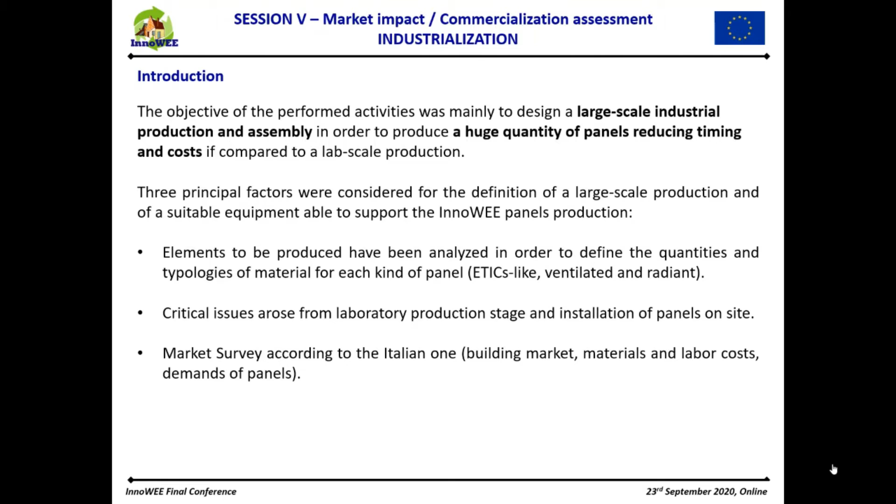Sorry. You have to have it in front. Please share again. Okay, sorry. It's perfect. It's correct.

A suitable number of panels to produce in a large-scale production process has been defined, equal to 200,000 square meters per year, divided into the different types of panels studied in the InnoWEE project. So about 100,000 square meters for the ETICs solution, 60,000 square meters for the ventilated solution, and 40,000 square meters for radiant panels.

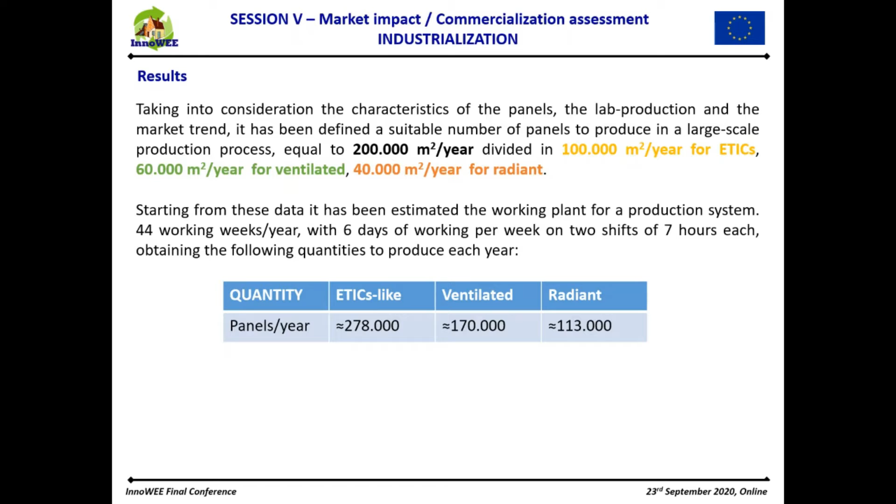We have supposed 44 working weeks in a year, with 6 working days a week on 2 shifts of 7 hours each. In these slides, you can see the phases for the production of the 3 types of panels.

So you can see the preparation of the materials for the cast of the panels, the production of geopolymer, the casting of the panels, laying the reinforcement and the EPS panel for ETICs and radiant solution, and the WGP panels for the ventilated solution. Then securing the upper mold, the first curing, the demolding of the panels, and turning

the panels upside down. The second curing, and for the ventilated solution, drilling holes in the elements, and at the end, the painting, drying, and the storage of the elements.

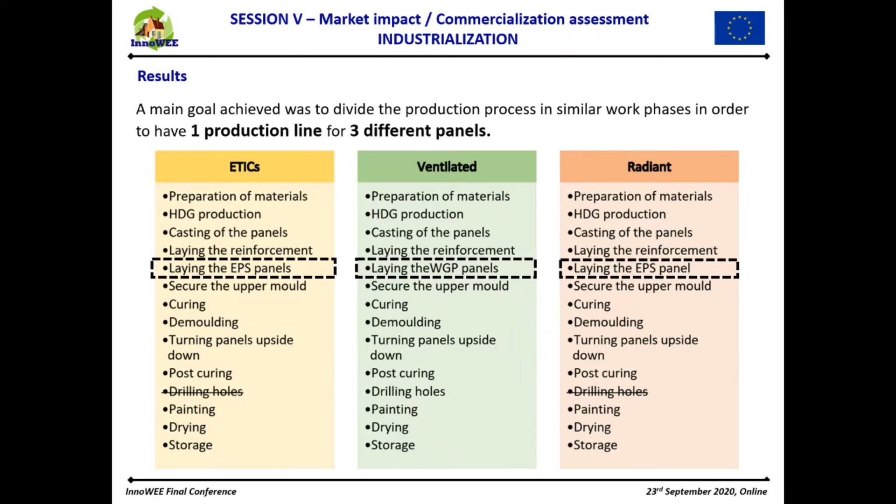Now you can see a general layout for a production plant for this type of panels, with 3 different areas. The mixing plant, where we produce the geopolymer, the production line composed of 11 stations, and the cleaning system where we clean the molds.

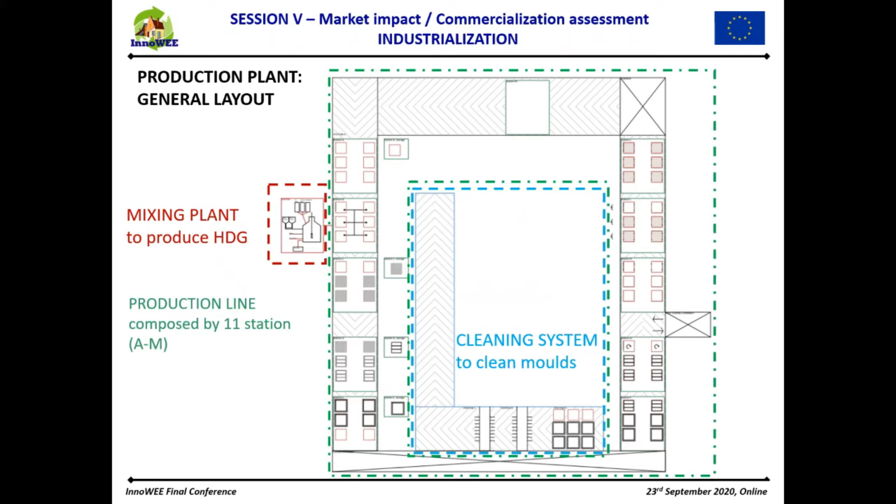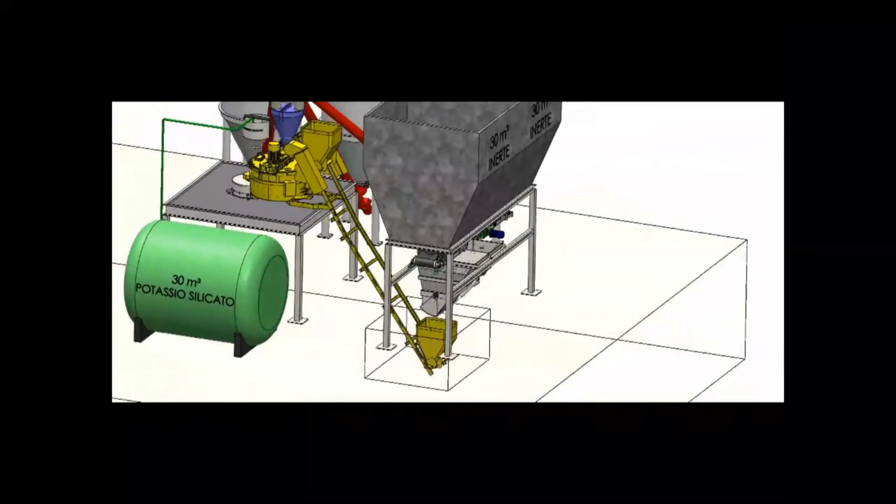In this video, you can see the mixing plant. The mixing plant is dimensioned to produce 8 cubic meters a day, about 2,000 cubic meters a year of geopolymer. It is composed of 3 silos for the powders, in particular furnace slag, fly ashes, and metakaolin.

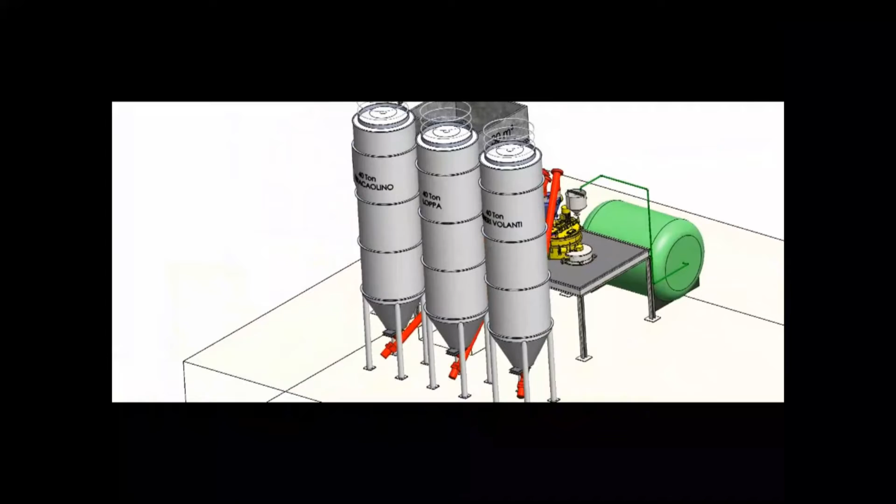1 mixer of about 250 liters, 2 hoppers for aggregates, 1 container of potassium silicate, and an automatic cleaning system for the mixer and the pipes.

The production plant is composed of 11 stations from A to M. You can see station A, where the molds are placed on the tray. Station B, where the geopolymer is cast in the molds. Station C, where the reinforcements, glass fiber mesh and bars, are placed in the molds.

Station D, where EPS or WGP panels are placed above the geopolymer. Station E, where the upper mold is placed above the lower one. Then we have the first curing chamber, where the panels remain for about 12 hours at 50 degrees. Station F, where the upper mold is removed and placed at cleaning station A.

Station G, where the panels are turned upside down and the lower mold is placed on cleaning station A. The second curing chamber: the panels stay in this chamber at environmental temperature and controlled humidity for about 96 hours. Station H, where the panels are drilled, only for the ventilated solution.

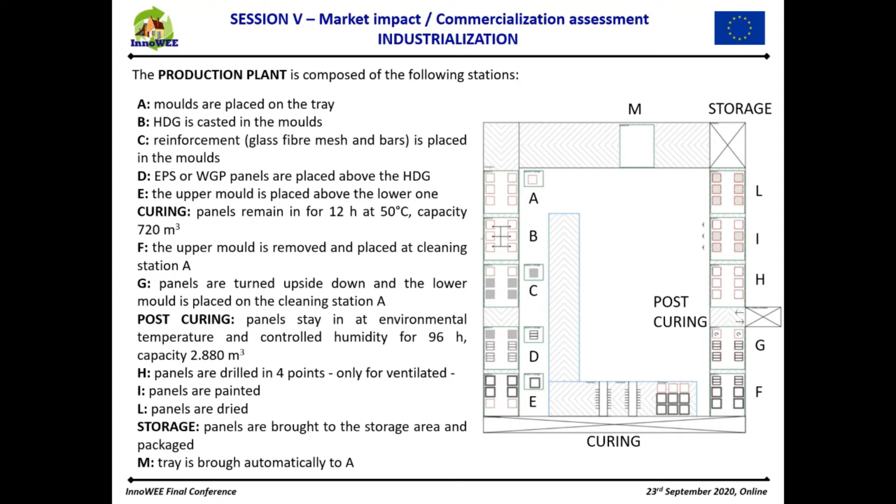The cleaning system is composed of 4 stations. Station A, where the molds are placed to start the cleaning process. Station B, where the molds are cleaned with the use of thinner oil. Station C, where we use release oil to spread on the molds.

And finally, station D, where the cleaned molds are placed closer to the production lines. In particular, the lower molds have to be placed in storage A, while the upper ones in storage B.

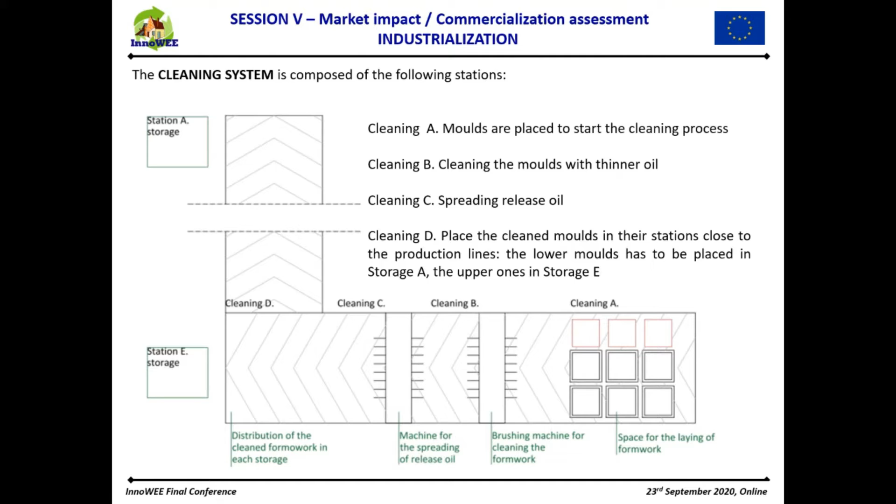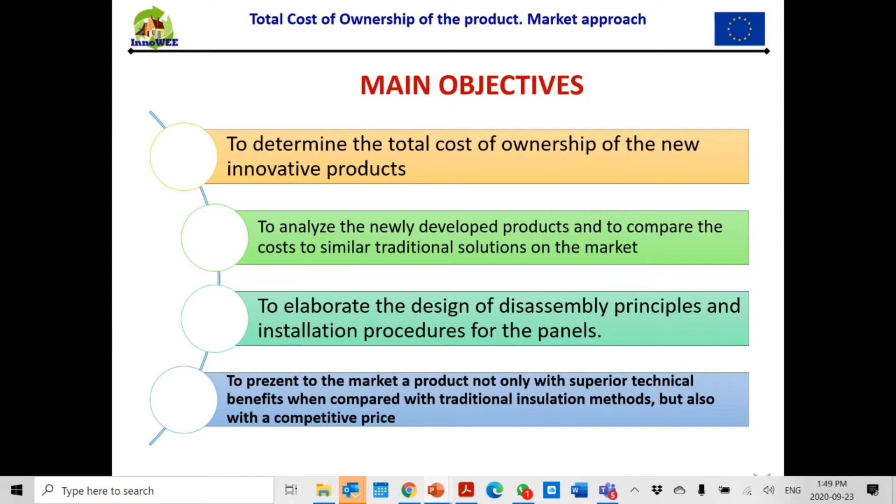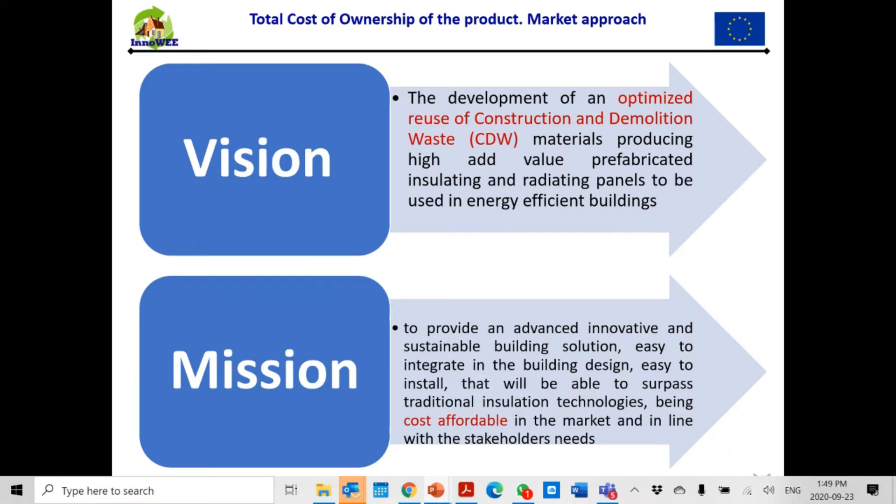Our vision was the development of an optimized reuse of construction and demolition waste materials, producing high added value prefabricated insulating and radiating panels to be used in energy efficiency. And our mission was to provide an advanced, innovative and sustainable building solution, easy to integrate in the building design, easy to install, that will be able to surpass traditional insulation technologies, being of course also cost affordable in the market and in line with the stakeholders' needs.

In order to define and calculate the TCO, the total cost of ownership of the product, we used the formula that you can see on my screen. In the TCO calculation we considered the production cost. We added also the installation cost of all three typologies of the products. We added also the maintenance cost, the dismounting cost after the 30 years of lifespan of the product, and we subtracted the remaining value.

In order to reach our objective, we first set up and identified all our cost elements. We compared the cost elements and the final result of the cost with the cost of traditional products existing in the market at this moment. We added the installation cost and other operational costs together with the production cost of the product, and finally we obtained the TCO results.

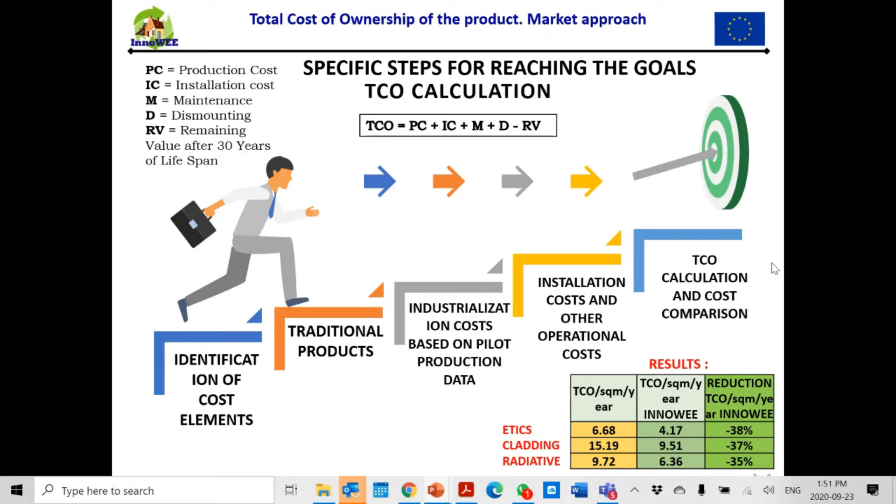To jump directly to the results that we obtained, here you can see the percentage of reduction of our InnoWEE products for the three typologies, ETICS, cladding, and radiative. Compared with the traditional existing products in the market, we obtained minus 35% for radiative, minus 37% for cladding, and minus 38% for ETICS in terms of cost reduction. These are very good results for the objective that we proposed at the beginning of the project.

Here I want to briefly present to you the traditional products in the market that we compared with. For the ETICS, it was quite difficult to find similar traditional products, because the particularity of our product is that it is already ready to be installed at the installation point, while the traditional products have to be worked on site. For cladding, the cost mostly varies depending on the typology of the material chosen for the ventilated panel, so wood, gres, marble, and on the fixing system needed in relation to the material of the panels. And we took as similar products the products from Terramilano engineer, and Sto Italia.

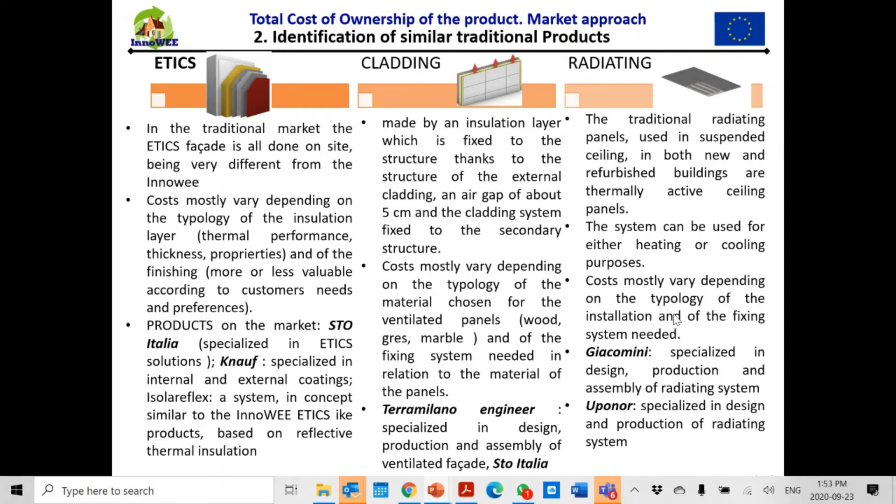For radiating panels, the traditional systems existing in the market at this moment can be used for either heating or cooling purposes. Their costs mostly vary depending on the typology of the installation and of the fixing system needed. We took as base for our comparison the Giacomini panels and Uponor panels, which is specialized in design and production of radiating systems.

Of course, the first question that we addressed, which constitutes the beginning of our study, was what is missing in the market at this moment. And the answer is that the traditional envelope insulation system presents some problems related to durability, performance in terms of maintenance, application based on hard labor, and of course high cost. All these issues can be minimized through the installation of an effective insulation system endowed with outstanding insulation capabilities.

Our goal, taking into consideration our goal, was to present to the market a product with superior technical benefits compared with traditional insulation methods. We can say that we have a very good result from this point of view because our innovative InnoWEE products present, compared with the traditional one, high insulation characteristics and high durability.

In time, our product has 30 years of lifespan compared with approximately 20 years for traditional products. Our InnoWEE products present lower energy consumption and lower application costs, being a product that can be used also for historical monuments.

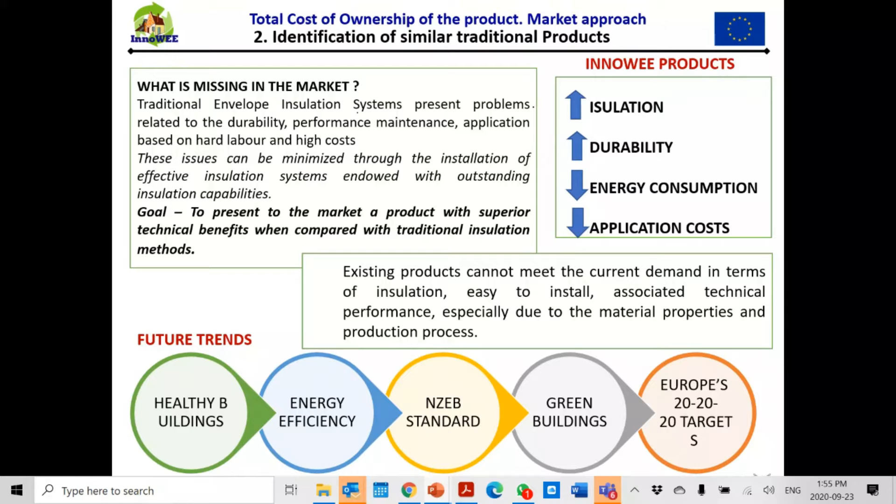Also, we are proud to say that our InnoWEE products reach all the future trends that are healthy buildings, energy efficiency and NZEB standard, green buildings, and touch also the Europe's 20-20-20 targets imposed by the European Commission.

Why does a building need superinsulation? That was another question that we addressed in our study. Walls are ordinarily the biggest responsible for the total heat lost and also gain throughout the envelope, so total heat loss or gain can be more than 35%. That's why our product comes with evident added value.

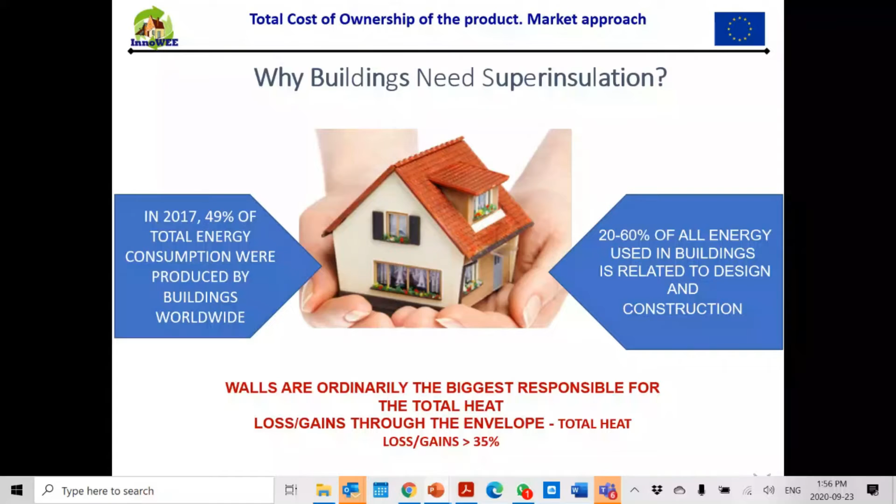Apart from the direct benefits that I expressed before, our InnoWEE product presents a lot of indirect benefits that we consider in the analysis of all three typologies of our products: long service lifetime, reducing environmental pollution and damages, reduction of energy spent during the whole life cycle of the building, easy and simple installation, low installation time and cost, significant cost reduction, retrofitting capability, respect for sustainable principles, safety and security, low maintenance and operational cost, adaptability from the viewpoint of dimension, ideal for historical monuments rehabilitation, and future recyclability.

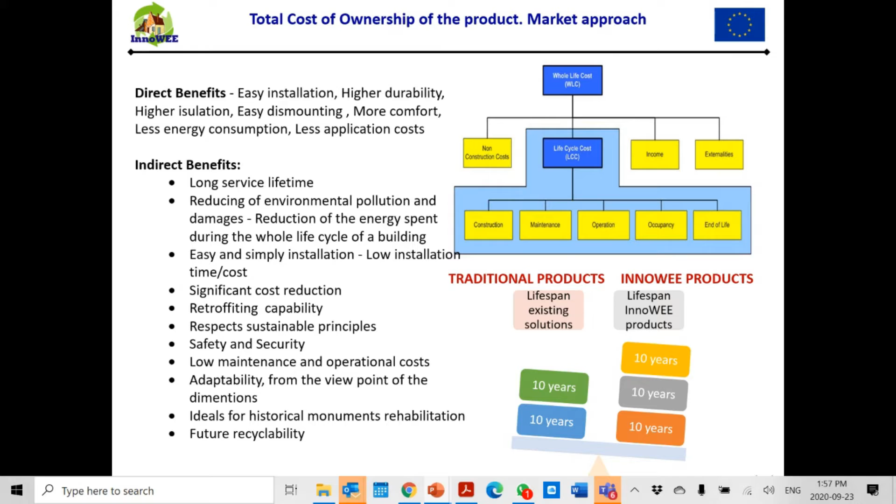Here you can see the lifespan of our product compared with the lifespan of existing solutions. As you can see, our product has 10 years more than the lifespan of the traditional existing solutions in the market.

In order to calculate the final TCO, the total cost of ownership of our product, we considered the pre-production, production, and post-production stages, taking into consideration the hidden costs, support staff, training, management, network, the direct costs, the indirect costs, the maintenance and technical support, and of course the dismounting cost of the product after the end of the lifespan.

In the product stage and preparation stage, we took into consideration raw material supply and the transport to the factory. The conclusion after our analysis was that the factory should be at a maximum distance of no more than 200 kilometers. This is the optimum distance.

Another cost was the manufacturing construction process, transport to the building site, and construction installation process. In the use stage, the costs related to use, maintenance, repair, replacement, refurbishment, operational energy, and operational water use. And regarding the end of life: deconstruction, transport to the landfill, processing, waste processing for reuse, recovering, recycling, disposal, benefits and loads beyond the system boundary, and reuse, recovery, recycling of the product.

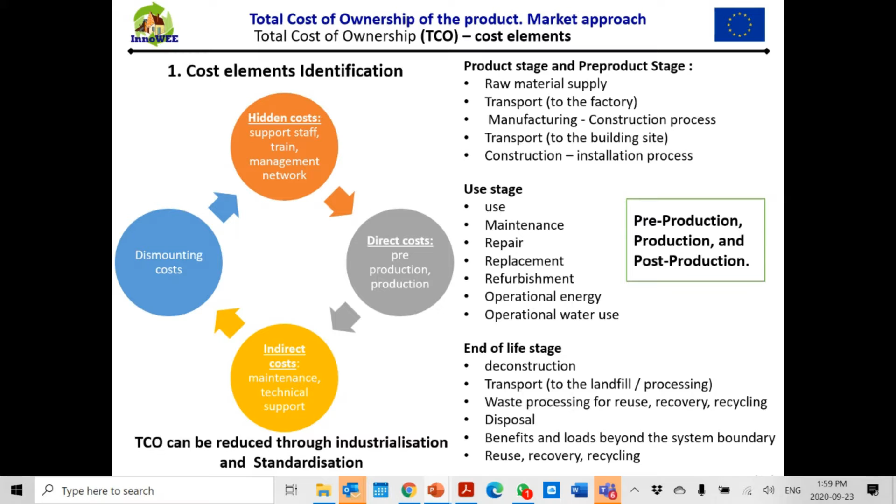We can summarize by saying that the final TCO can, of course, be reduced through industrialization and through the standardization of all the production processes of the three categories of product.

Regarding the methodology that we used for the TCO calculation, I presented before the formula and the relative costs that we took into consideration. We also took into consideration the lifespan of 30 years for our product compared with 20 years for traditional products. We took into consideration also some labor cost as a function of territoriality.

As methodology, first of all we choose the products that we want to compare with. We calculate the TCO, which is an estimation, a range of the cost of the products existing on the market. After that, we calculate the TCO of our product, and finally we compare the two results.

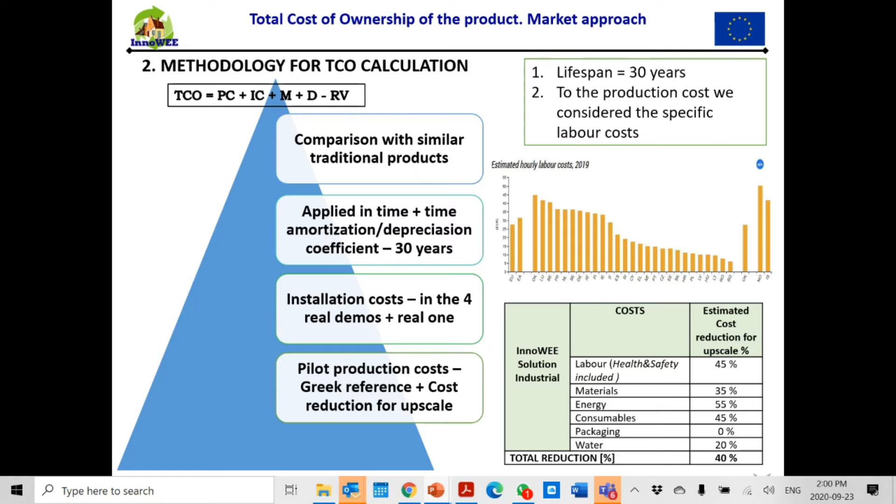Here I want to briefly present some results. Here you can see the calculation of the industrialization cost of our product. As a methodology, we took into consideration the cost from the pilot plant, to which we applied a total reduction of about 40%. For adapting other more efficient production methods, we applied a reduction of 15%, and 12% for improving the performance of current production methods.

Thinking of an industrialization process, that means about 2,000 products per day as an optimum production.

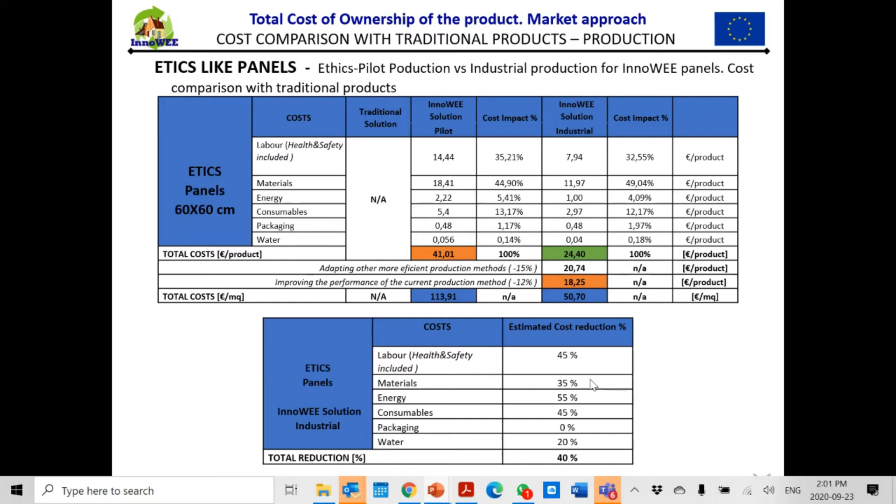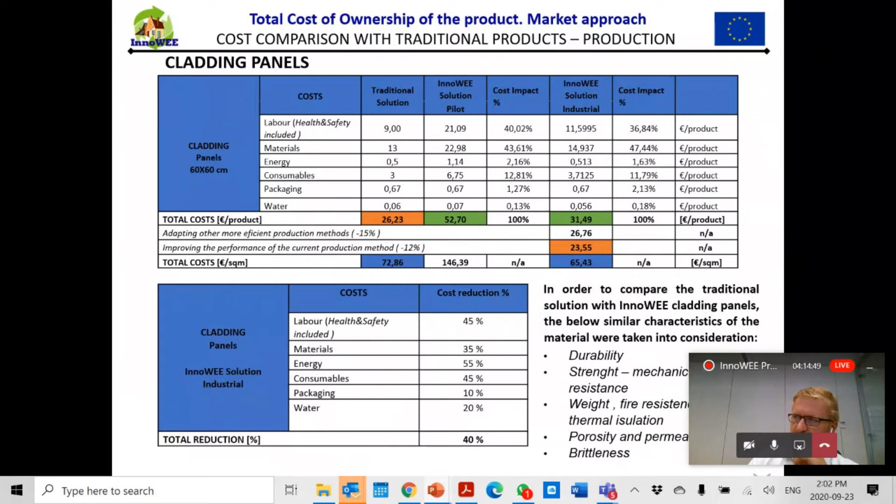Here you can see the results for cladding panels. We used the same methodology for radiative panels, and the results we obtain, as you can see here, from the point of view of the production process, show that our products could be inferior regarding production cost compared with the traditional one. Meanwhile, the ETICS products present production costs superior, not much, but superior to the traditional solutions.

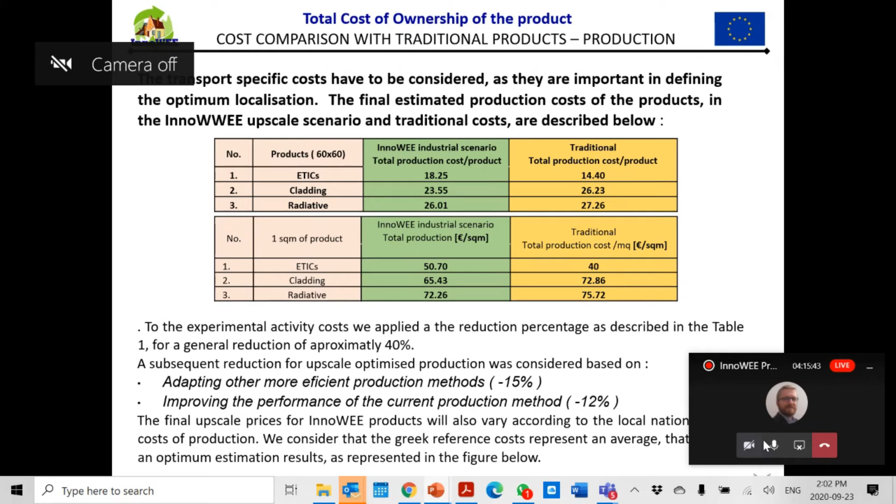Sorry, it's blocked. Can you hear me? Yes, Loredana, I hear you. You need to share the screen of your Teams now. Please go back to the presentation. Sorry, I don't know what happened. Maybe you closed it, don't worry. Okay, share again. Did you see this slide?

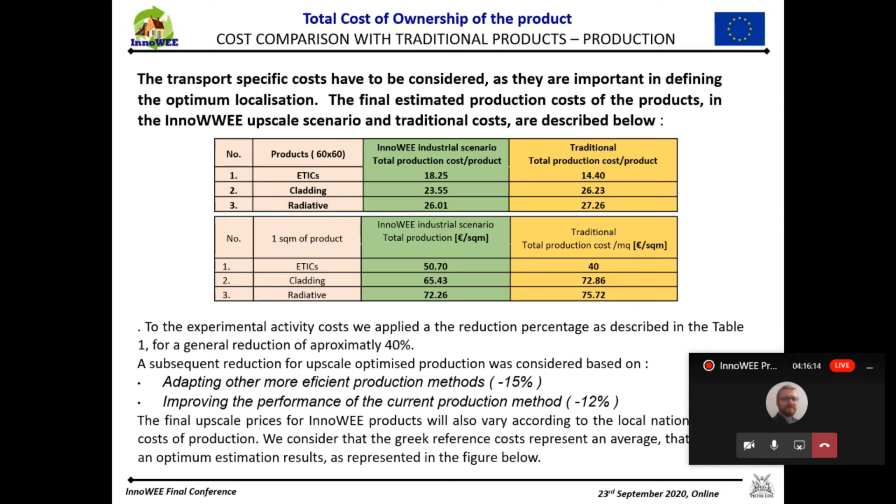Yes, this is where the transport specific costs have to be considered. So we gain in terms of final TCO results. We gain with installation costs that are inferior to the existing traditional solutions, and of course we gain a lot by presenting to the market a product with a long lifespan, 10 years more than traditional products. So the final results show that our three product typologies have a decreased cost compared with traditional solutions, between 35% and 38%. We are proud of these results, and we trust that our product has not only superior technical characteristics.

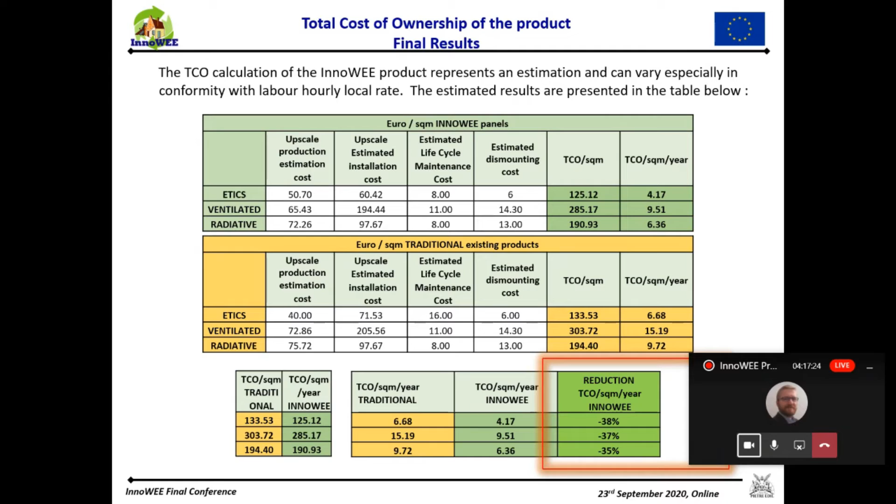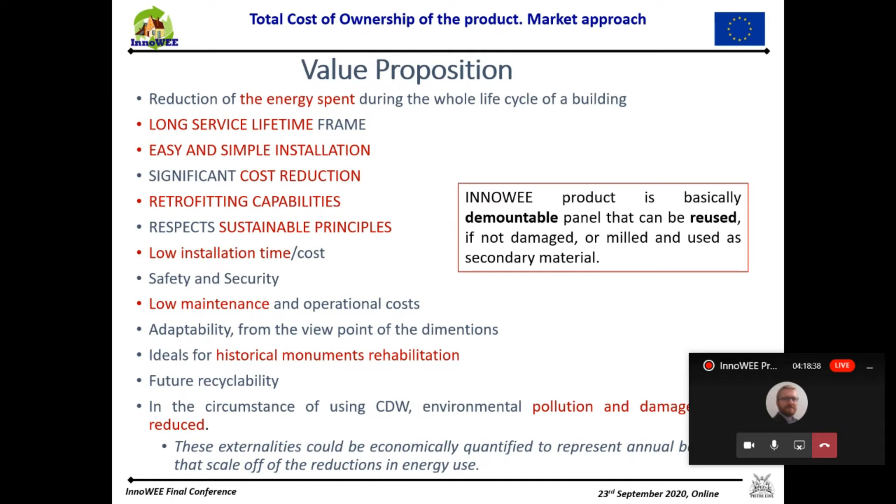In the circumstance of using CDW, environmental pollution and damage will be reduced. All these externalities, as I presented to you, have also been economically quantified. The InnoWEE product is basically a demountable panel that can be reused if not damaged, or milled and used as secondary material.

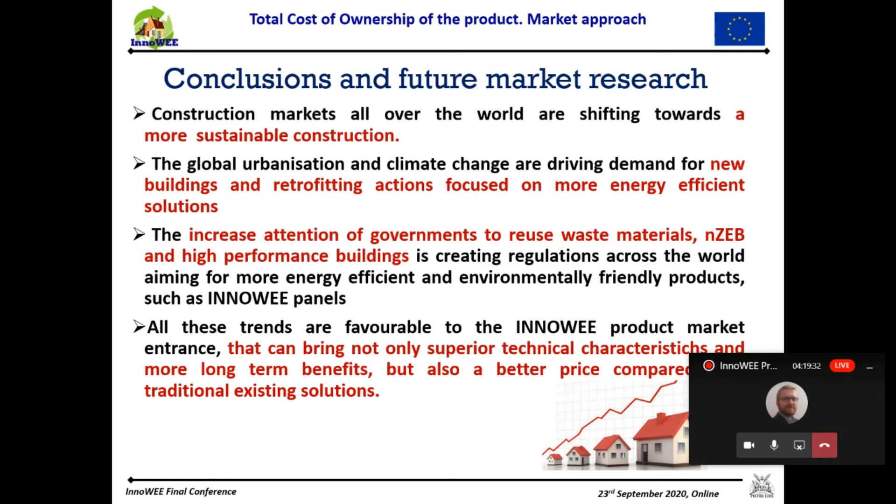Some conclusions and future market research: the construction market all over the world is shifting towards more sustainable construction. Global urbanization and climate change are driving demand for new buildings and retrofitting actions focused on more energy efficient solutions, with increased attention from governments to reuse waste materials, and nZEB and high performance buildings. All of these trends are favorable to the InnoWEE product's market entrance, which can bring not only superior characteristics and long-term benefits, but also a better price compared with traditional existing solutions. Thank you for your attention.

We really trust in our product and hope to see it in the market as soon as possible. So any business needs accountants, and now I'm sure that having Loredana on board, I could make the success.

Now it's the turn of Jakub Pluta from IZNAP Poland to give the speech on exploitation plans. Jakub, the floor is yours. Good morning to all the attendees of this conference. My name is Jakub Pluta, and I'm an engineer from IZNAP, the Polish SME, a partner in the InnoWEE project. I will present the exploitation plans of the InnoWEE project.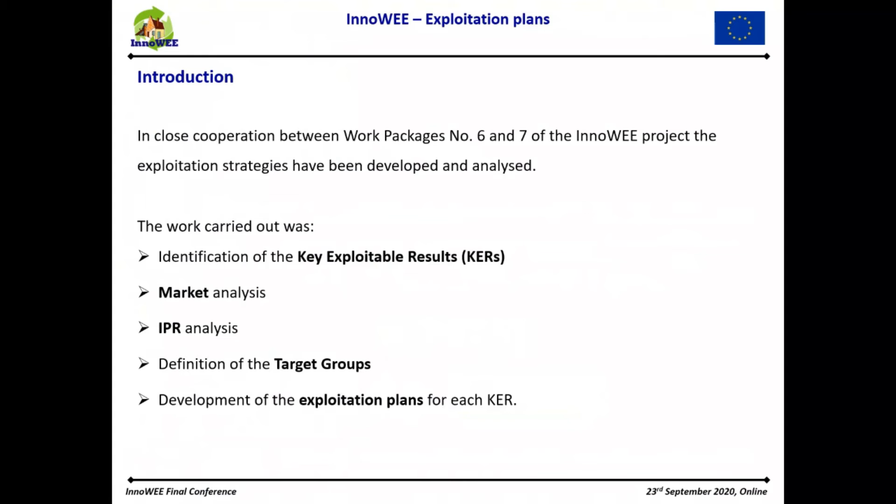These plans have been developed in cooperation between two specific work packages of the project: work package 6 for market and cost analysis, and work package 7 for exploitation and intellectual property rights management, to provide the exploitation strategies for InnoWEE results. We had to follow certain steps: first, define the project results and more specifically the key exploitable results; then analyze the market situation to identify competitive products and define the innovativeness of our results; with IPR analysis for each result, establish its ownership; then define our target groups of customers to offer the results to. With this, we were able to develop the exploitation plans for each key exploitable result.

But what exactly is the key exploitable result? It is the result of a single project result or a few project results, which together can provide a competitive product or service to the market, and which bring the innovativeness that makes it competitive and different from other technologies currently in the market.

So simply, the key exploitable result is the result which has potential to be commercialized in the market. After 4 years of the project, in the final list of results, we identified 10 key exploitable results, and here I will present 4 products.

One of them is the pilot plant modified for production of fine fraction secondary raw materials from construction and demolition waste, in the size required for geopolymer production. It provides aggregates of size from 0 to 2 millimeters, and also allows us to adjust the size as we want.

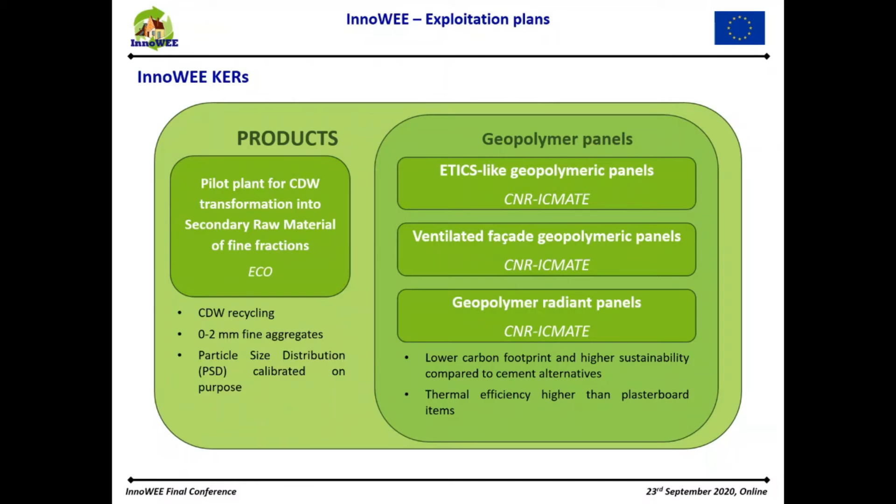There are also 3 processes as a result of the InnoWEE project. One is the geopolymer panel production unit. Here the strong point is the owner's strong know-how in building and modification of production lines for geopolymers. This solution is now some kind of unique in the current market.

The other 2 processes are the production process and optimization for 2 geopolymer binders: one inorganic, with inorganic construction and demolition waste incorporated, and a wood binder with wood waste content. Similar to the panels, they also provide a lower carbon footprint by incorporation of construction demolition waste. They are optimized to be used in production of geopolymer construction elements for building and production processes.

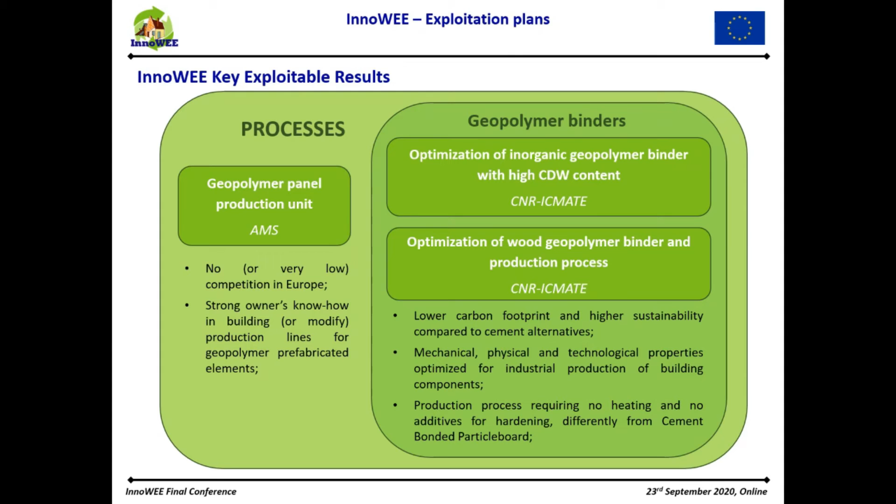The production process of the binders does not require providing heat or other additives for hardening, which is needed in case of other alternatives. The last 3 key exploitable results are services.

The first is the prototype IR procedure for thermal testing of ETICS walls. It offers easy to perform thermal tests and now has no competitors in the market. The life cycle assessment of geopolymer products provides the LCA datasheet for geopolymer-based products based on real data and tests obtained directly during the 4 years of the InnoWEE project.

InnoWEE also offers a new engineering design for geopolymer prefabricated panels. This result is an innovation by itself, as there are currently no geopolymer panel solutions available in the market, so there is no design for how to use them.

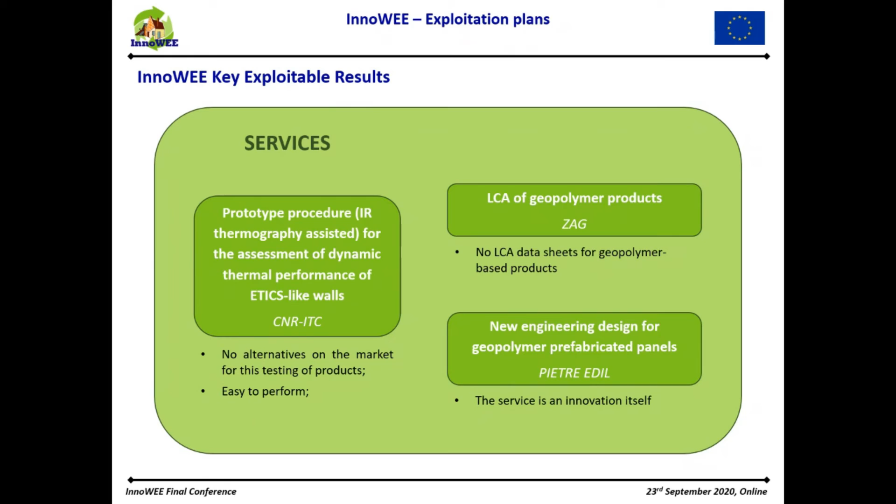The next part was the definition of the target customers. In case of InnoWEE, they are the geopolymer manufacturers, to whom we will offer the fine fraction secondary raw materials, the geopolymer binders, and the LCA service.

For the manufacturers and distributors of prefabricated elements for buildings, InnoWEE offers 3 types of panels and a production unit for geopolymer panels.

For heating, ventilation, and air conditioning installers, they can be interested in the radiant panels for heating or cooling, and in the IR test for the ETICS walls.

The new engineering design can be offered to architects, constructors, and public authorities, but constructors can also be interested in all the panels and use of the secondary raw material aggregates in other applications, as the aggregates in sizes not suitable for geopolymer production can be successfully used, for example, as fillings in road construction.

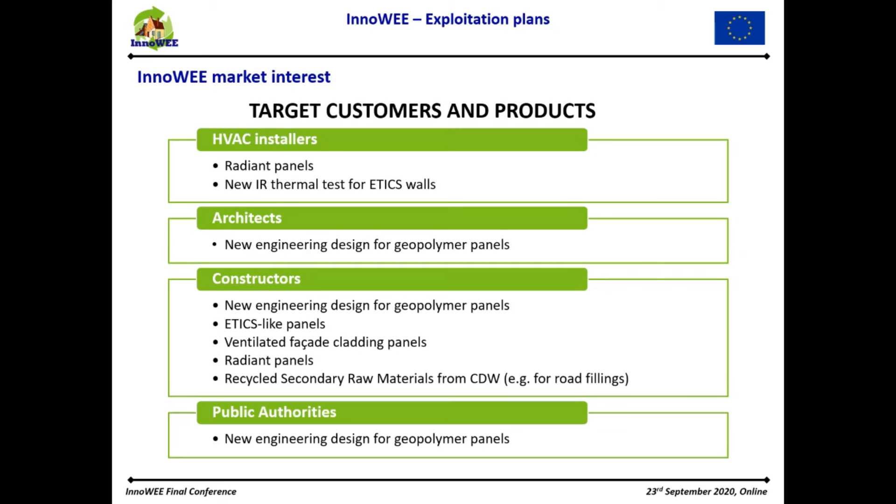During the 4 years of the InnoWEE project, we identified some advantages and disadvantages - meaning the barriers in market introduction of InnoWEE results. The opportunities are more strict standards and requirements for CO2 emissions, requiring a bigger share of recycled materials in the market, and bigger requirements for energy efficiency of buildings.

There are also needs for faster construction, where InnoWEE provides easy and fast to install prefabricated panels. Also, the tests performed by ZAG are providing very promising results about the environmental impacts of InnoWEE solutions.

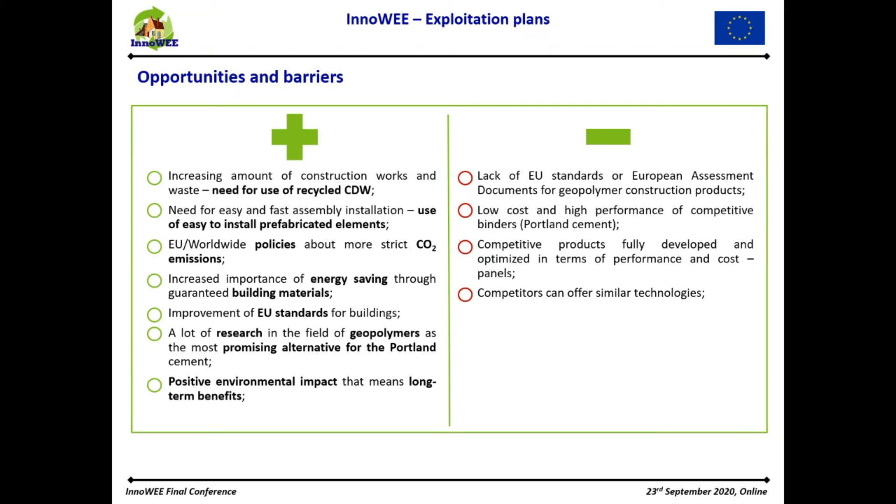Regarding the barriers, besides improving and more strict standards, there is also a lack of regulations defining the use and assessment of geopolymer-based products. Some alternative technologies, such as Portland cement, can be offered at lower costs. The technologies currently existing in the market are fully developed and optimized, while in the case of InnoWEE panels and binders, it still needs some tests to reach a fully developed product.

So when do we expect to reach the market? Within the InnoWEE project, it was assumed to enter the market within 5 years after the project's end. Some of the products and services are ready now, so it depends on the owner to decide when they want to enter the market. But for the InnoWEE panels or the construction products to reach the international market, it is required to obtain the CE mark.

However, it is available for products with a technology readiness level of 8 or 9. In the case of InnoWEE panels, this level is 6, which is what we achieved and what was the goal of the project. However, to provide the fully developed product to the market, some tests and demonstrations are still needed.

Going to the conclusions, for each key exploitable result, it was necessary to analyze its innovativeness and market situation and establish its ownership. There still exist barriers to introducing geopolymer products to the market. Geopolymers are still a new technology, especially in the construction sector. So there is a need to develop European standards or a European assessment document which will support such products.